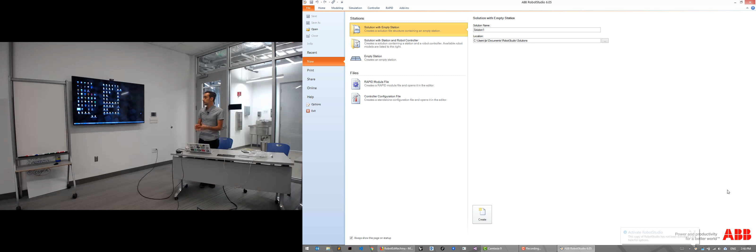So we're gonna do that right now together. We're going to open Robot Studio, and I want to do this with you because sometimes there are a couple details that are missing and they lead to frustration, so that's why I want to do it together. First thing we're gonna do is create an empty controller. And if you get lost or anything, I'm recording this whole thing, so you can always watch it later. Don't be afraid, don't panic.

We're gonna create a new solution with the robot controller. We're gonna call this whatever, like test with Machina with an IRB 1200, for example. It doesn't really matter. Then here you're gonna choose which robot model you want to work with. You'd typically choose whatever is closest to what you have in your school or practice. For the sake of this workshop, I'm going to choose an IRB 1200 because it's a mid-sized robot, and we have one of those downstairs that's very easy to use, so it's a good frame of reference.

So we're going to choose one of those, and I want you guys to please click on Customize Options. We're going to hit Create, and it's going to take some time to process. It's going to prompt you with a menu - this is the menu I wanted to access. This menu allows us to customize what features this robot has. It's like with cars, you can choose extra features which lead to extra functionality, cool things, right?

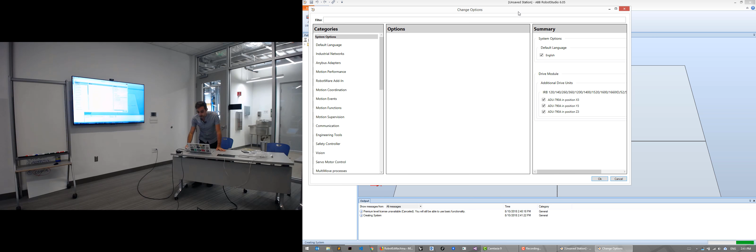It's important, because we're going to be doing real-time robotics, that the robot has what's called the PC interface, which means it's an option that allows the robot to communicate via TCP IP with other devices. If we don't have that in our virtual robot or in the physical robot we have somewhere, you won't be able to do real-time robotics at all with ABB robots.

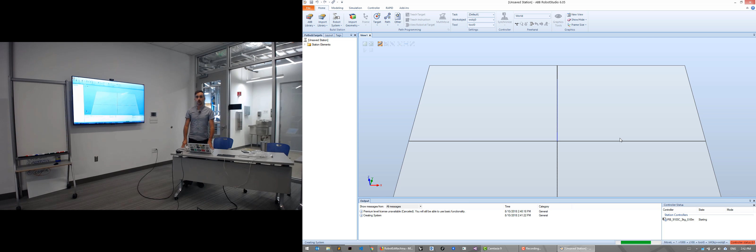So here, we're gonna go to communication and choose PC interface, and then we're just gonna start this one. We're choosing Robot Studio because we want to test things out before doing anything with a physical robot, and it just so happens that Robot Studio as a simulation environment is by far the best thing I've ever encountered for industrial robots.

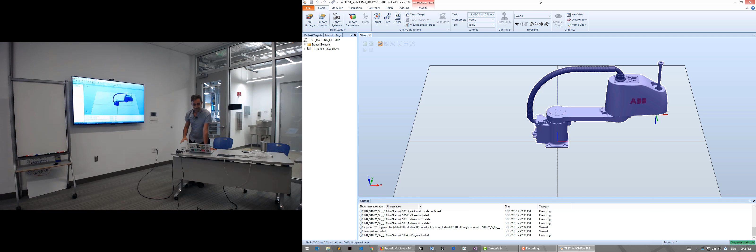And since Machina, which is the platform we're going to be using here, is - oops, this is not the one. What did I choose? Okay, I'm going to start over. I'm going to close this thing. I don't know - all right, and then, oh yeah, okay, so this one.

And as I was saying, since Machina is a programming language that connects to many different virtual and physical robots with the same language, if you try things and they work with ABB robots in Robot Studio, very, very likely they're going to work the same in any other brand of robot or with any other physical robot. So here, I'm going to be prompted to choose this guy.

And that's it. We have a virtual simulation of a robot. And for all practical purposes, this robot that we have in our system, in our computer, is as if we were physically connected to a physical actual robot. All right? We can do TCP communication. We can do messaging, socketing with this guy as if we were connected to a physical one. That's why Robot Studio in particular is very good for these kind of real-time simulations.

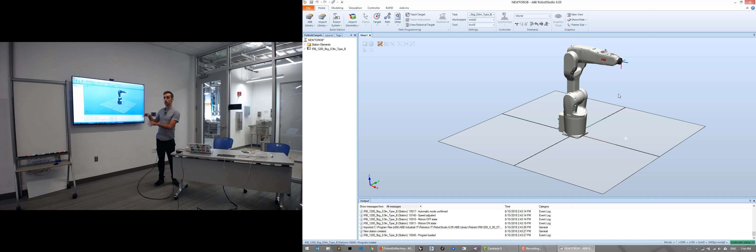All right? Any questions so far? Okay, so then let's go back to the cool stuff. We're going to minimize this for a second, all right? And I'm going to prompt you guys to come here to the main website with the repository of all things Machina, okay? The website is github.com/robotexmachina. And Machina is a project that I've been working on for the past year, year and a half.

And it's like many other projects in this field. It's a framework of systems that allow you to customize, to control, and to program robots, right? There are many of those out there. And the special thing about Machina, the thing that makes it a bit different, is that it tries to focus a bit more on the real-time aspect of communication with robots, right? So most of the decisions that I made on how Machina behaves and how the language looked like is catered towards making it very immediate.

All right? Many of you have probably 3D printed something in your life, right? 3D printing is a process where you basically make all the design, you model everything in a digital environment, you make all the slicings with your tools, and then out of that slicing, you create some kind of program, like G-code, for example. You put it on a file, stick it to a printer, and then you hit play. And then you hope that runs, right? That is not real time at all. Everything is pre-compiled, pre-processed, and once you start the actual fabrication part, you're done. You're out of the process, right?

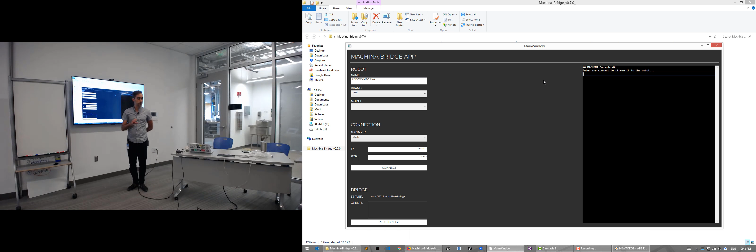You will have a folder where you have a lot of executables, DLLs, and very likely if you're running Windows 10 and you double click on the main file, which is Machina Bridge here, it will give you an alert like, oh, you downloaded this from the internet, it's dangerous, blah, blah, blah. Well, if you don't trust me, then you can leave right now. Otherwise, you can just say, no, I just want to run it anyway. And when you double click, something like this should pop up, all right?

Again, I pre-apologize. This is super, super bare bones. I'm working on this every day. And there's a lot of things that are missing here and are popping up as I have time.

Who's with me? Who is not with me? Are we all here? Matthias? All right. Are we good? Everybody? Okay, great.

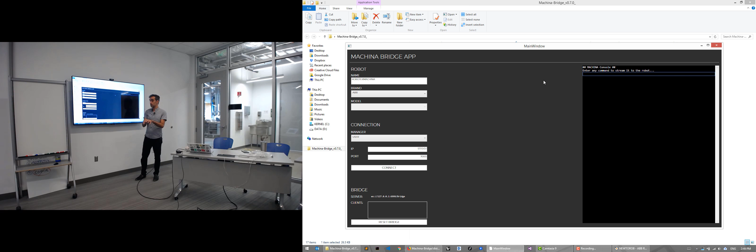So what is this? This is a small application that I'm working on right now, as of today, which is powered by this core library that I told you about. What this application does is it connects to physical or virtual robots, like the one we have right now in Robot Studio. So we can input here the data, and then it gives you a small console, like a command line, where you can input actions that you want the robot to execute right away. All right? So let's see how that works.

What I'm going to do is move this to the right, and I'm going to dock my Robot Studio on the left-hand side. And I'm going to go here, and I'm going to choose a couple of things. Here, you could write what name you want to give this robot. Here, you would choose the brand of robot that you would want to work with. Right now, we can only do ABB or Universal for real time. KUKA is coming sometime soon.

And then here, you want to choose which kind of connection manager you're going to use. I'm not going to get into this right now, but just for the sake of this workshop, just type Machina, because Machina will basically take care of everything that means connecting to a robot for you. All right? So we're going to do this, and I'm going to hit connect. And if everything goes well, I should see things happening here in Robot Studio.

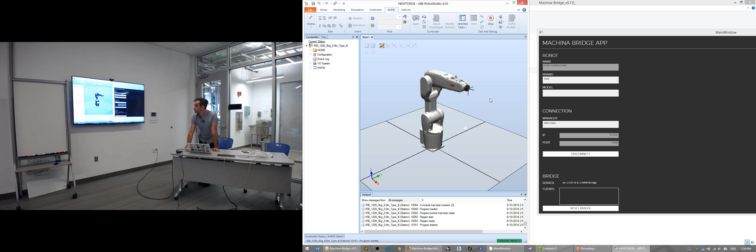And if I go to the Rapid tab, you can see that the button that I had here for executing programs is not a play button anymore, it's a stop button. Which means that right now, Machina did connect to the robot. It injected a special program called a driver. And now it executed this driver, which means that the robot right now is executing a program that is listening for instructions coming from this guy. All right? The robot is executing, but it's just listening for me to tell the robot to do things. All right? Any questions so far?

All right. So now I'm gonna switch to this part. Because we are connected already, and because the robot is listening to me doing actions, now I can tell the robot to do things. So for example, here in the console, I can click on the console, and I can type Machina-style commands to make the robot do things. So for example, I can make the robot move in any XYZ direction. So let's say I want to make the robot move in the Y direction. And I want to make it move 100 millimeters.

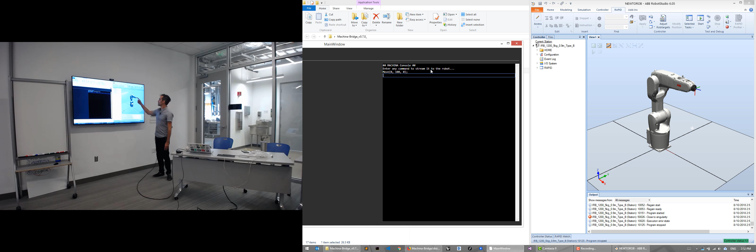So what I'm going to do is I'm going to say move. I'm going to open parentheses, 0, 100, 0. I'm going to close parentheses, and I'm going to put a semicolon. If I do that, you can see that the robot just failed. The robot just failed because the robot is very close to a singularity. All right? So let's wrap up again.

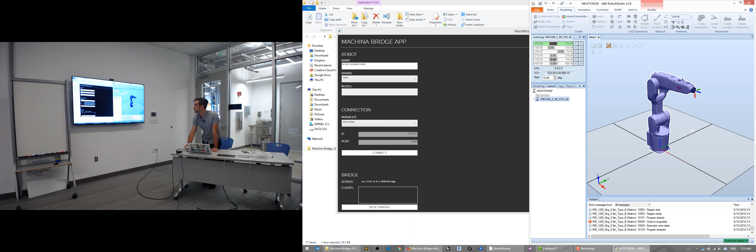I'm going to disconnect from the robot, and then I'm going to do a small trick where here in the robot, I'm going to move it manually out of the singularity by going to modeling, right-click, joint jog, and then just moving one of the joints. Okay, for example. All right?

Questions? How are we doing? Is it moving? In Parallels? Yeah. No? What is not working for you? All right.

All right. So, because you're doing this, like, what is it called? Where's the bridge? Okay. Can you connect? That should work, right? Okay, yeah, that should work. All right. I'll try. Well, that's a very tiny console, man. Huh? Are you still there? Oh, shit. Because in the beginning you did something that I think we skipped, and now every time we connect, it automatically closes Machina. Okay, so close this guy. Just create a new one here and choose this one. Yeah, there we go.

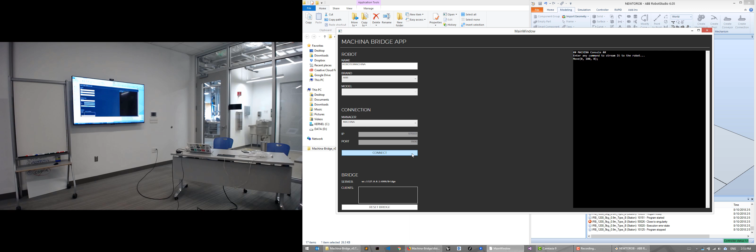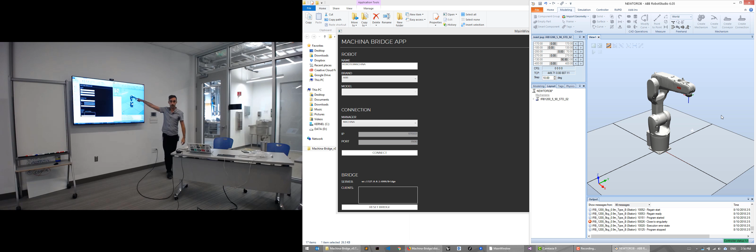So, okay, let's rewind. We have the robot here. The robot is not on a singularity, meaning the robot is not facing forward like this. So you can just move it somewhere like this. And then I'm going to connect again. As I connect, you can see that stuff happens here, and the program just started, which means this is listening to Machina right now. Let's see if this works. I'm going to move 100 units in the Y direction. And you can see that this thing is moving. I'm going to wait until we're all here. Matthias.

Good? Okay. Because this is all in very early development, and because robots can be dangerous, if anything goes wrong with the bridge or with the communication, everything is going to crash and give you a fatal error. You're going to have to restart again. That is on purpose, because I don't want you to have an error that you didn't realize and keep going. That may lead to bad things. So that's why some of the people who've been using Machina for longer are a bit frustrated with the amount of errors, but it's a safety measure as of today.

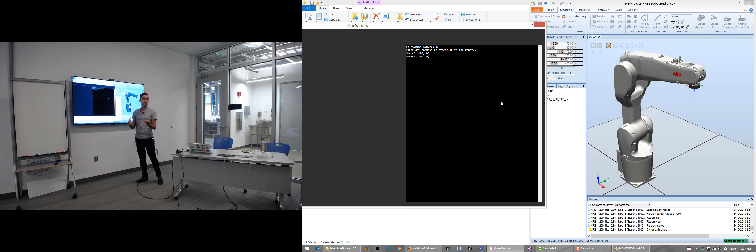Are we all here? All right, so let's start playing with the robot. As you can see, we have this command line here, and any action that we tell the robot to do, it's going to do right away. So for example, we can move in any XYZ direction. I'm going to move up: 0, 0, and 100. Now I'm going to move in the X direction, 50, 0, 0. And now I'm going to move down a lot, like 300.

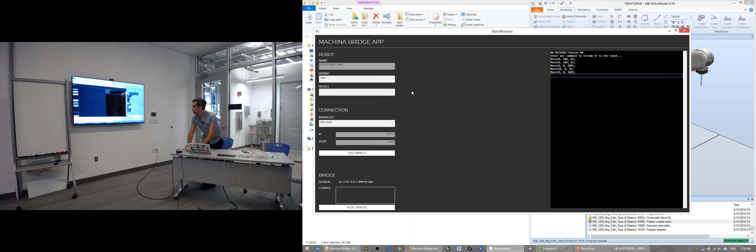And, oops, nope, I went too far up, and the position is out of reach. So what I'm going to do is just disconnect, connect again. The program started, so now instead I'm going to move it down: 0, 0, minus 300.

Notice that it's going to take some time to go down. So in the meantime, I can tell it to go in the Y direction. Machina also takes care of queuing and buffering everything for you. This action is not going to execute until the robot is done going down. The next action doesn't trigger until the previous one is done. It manages all the queues, the buffering, giving priority, etc.

This is a little slow. Perhaps we want to speed the robot up. So we can do speed, and set it, for example, to 100 millimeters per second. If we do that, nothing happens in the robot, but the next action is going to go faster. So I'm going to move up 200, and now the robot is moving much faster. Questions? Matthias? Valentina? Good? Yeah. Linear TCP speed. The speed is always in relation to the tip of the robot.

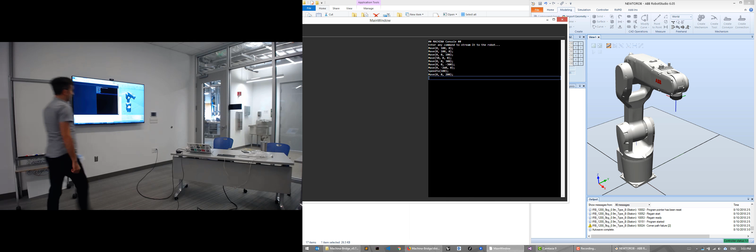Just transform is a more in-depth command for moving, because you set location and orientation at the same time. All right. So now you should be able to move, actually. Matthias, you should be able to move. Simply move now. All right? So, things you can do. You can move in any direction, right?

But you can also move to a location in Cartesian space, like X, Y, Z. The difference is, instead of saying move, which is a relative action, so from wherever you are, move a little bit in X, a little bit in Y, you type move to, where you're saying, I don't care where I am, I want to go to this new XYZ location. So for example, 300, 200, and 400. The robot is going to go to those absolute coordinates in Cartesian space. All right?

I can still move relative in any direction. I can move up. All right? Does that make sense? Okay. Other things that I can do. What are the things you think you would want to do with the robot? How would you want to move it? Simple moving is a bit boring.

We may want to rotate the tip of the robot, right? So for example, let's say we want to make this robot face me. If I was in the front, what kind of rotation would that be? A rotation around what? If I wanted to make the robot face me like this, we can rotate around the y-axis, right? So it will be a rotation around the y-axis.

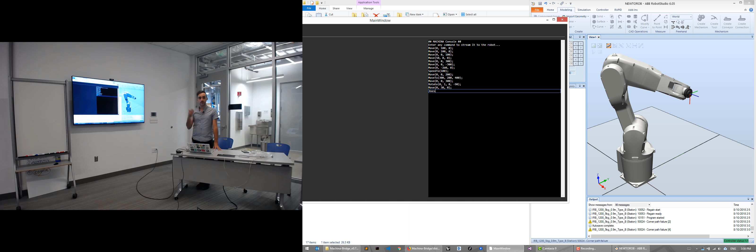For example, home position, like we started, is a very common position to start and finish a program on. For ABB robots, the joint angles are 0, 0, 0, 0, 90, because it's facing down, and 0. So we can set the axes of the robot to the absolute values 0, 0, 0, 0, 90, and 0. As I do that, the robot rotates back to its original position. Home position.

I don't know where this point is in space right now, but I know that it's always going to be this posture for the robot. All right? Okay, any questions?

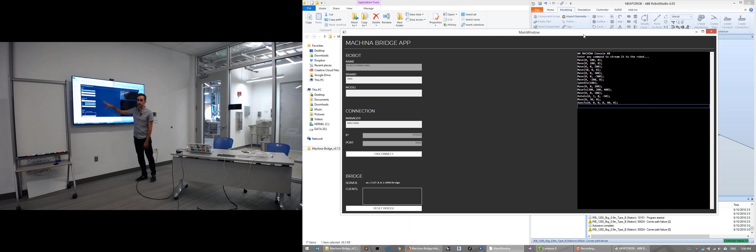So, as I was saying, this is super, super bare bones, and the console should give you way more feedback on what's going on in the system. There will be more buttons here to stop, play things, to look at the queue of things that are happening. It's all in progress, all right?

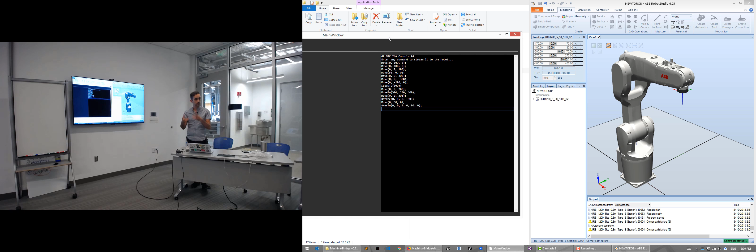But one of the nice things about, well, let me put a pin on this one, all right? So if you use this application, the bridge, you can connect in real time, and you can stream, and you can move the robot, and you can see what's going on, right? But we may want to control the robot or to generate programs with the robot that are a bit more complex and that involve a lot more geometry, form, 3D printing, pick and place operations, which if we did them by hand, would be a little bit of a pain in the ass, right?

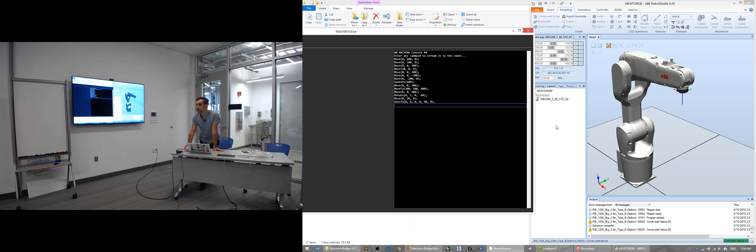So that's why this is the main interface, the more direct one, the most tangible one, but we can use other interfaces that connect to our regular tools that we use. So for example, did you download the Machina for Grasshopper application? If you go to the main repository, you can see that there's actually a lot of different tools that connect to different platforms.

So there's a Machina that you can use in Grasshopper. There's Machina that you can use in Dynamo. There's Machina that you can use if you work with Python, if you work with Processing, etc. And all of them are open source. All of them are accessible. You can hack them. You can contribute to them. You can modify them. It's all very open.

And you can download the latest version for Grasshopper. If you go to the Grasshopper project, you can download it from the distribution folder. You can download the latest zip file, and it contains the library. Or you can go to Food4Rhino, and you will always be able to find here the latest version, the most up-to-date version, with the best features and with the fewest bugs, hopefully, right?

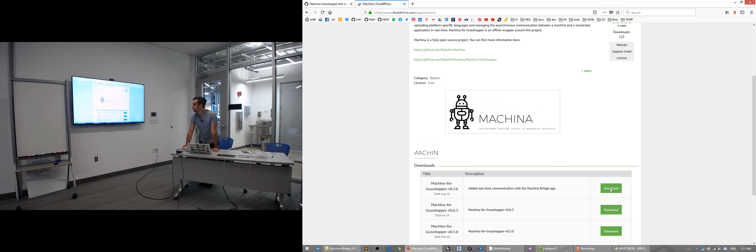If you download this package, you will be here. You can extract this, and what you will get is this. These are the files that you have to dump into your Grasshopper libraries folder. And this is a package with a lot of sample files, so that you can see how it works, okay? I'm going to give you a couple minutes to install this on your system if you haven't. I already have it.

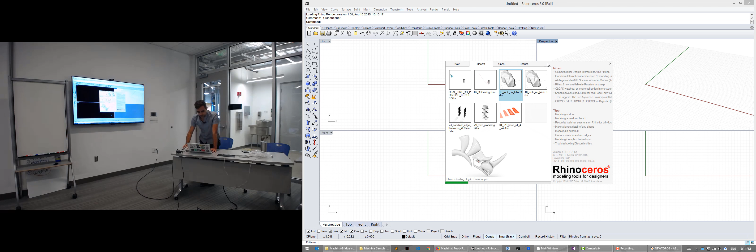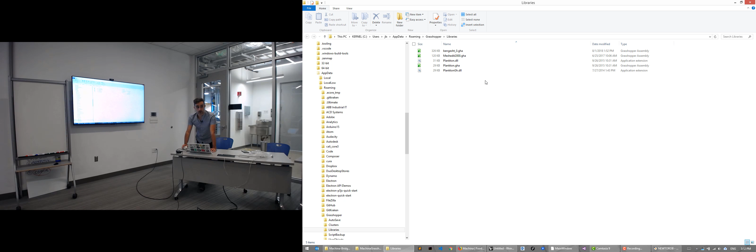For those of you, you probably know already how to do this, but if you open Grasshopper and you go to special folders, you should be able to click on the components folder. In the components folder, this is where you should dump the 3 files that you downloaded. So these 3 files, you should paste them inside of the libraries folder. And remember, please, to right-click on those files and to unblock them, because you downloaded them from the internet. All right?

After doing that, you will have to restart Rhino and Grasshopper, both things. Once you do, you should be able to have something like this. You should get a new tab here called Machina, and you should get a set of components like this. It does or it doesn't? I haven't tried it yet. It works? Yes.

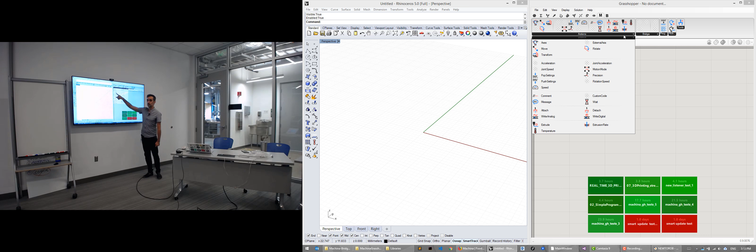As you guys can see, I could totally use some help with the icons, which is also an open source project, just in case there's any designer here in the room, if you want to contribute to an open source project.

Yeah, it doesn't block the files. Yeah. Are we all here? We got it?

All right, so I'm just going to open some of the sample files. I'm going to go to the sample files, and I'm going to open the hello world, for example.

The main idea when you create programs with Machina is that you create programs by defining what the robot wants to do, which actions you want the robot to execute, one after the other in sequence, like you would for a kitchen recipe. Do this, now do that, do the same. It's very straightforward. So anything that the robot can do is called an action.

And anything that's an action is in this large menu here. So like you saw before, for example, moving, rotating, setting the axis, or setting the external axis, changing the speed, popping up a message on the robot, waiting for an amount of time, all of those things writing into the IOs, or, for example, extruding, setting the extrusion rate, setting the temperature, because Machina also works for 3D printers. So all those things are things that you can do.

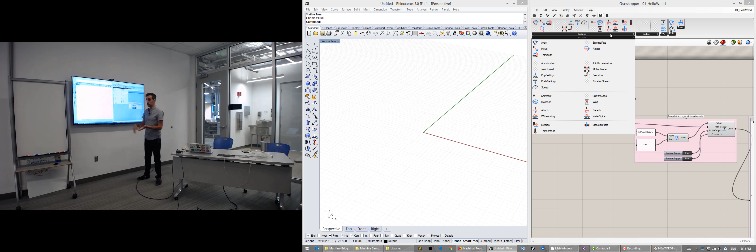Basically, creating a program is just as simple as creating a list of actions and then doing whatever you want to do with them. So for example, here in this simple program, what I've done is I just created an action, which is display a message on the robot.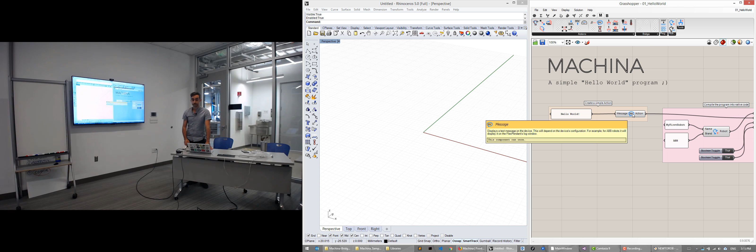Once I have that, what I can do is I can compile that list of actions for a robot that is an ABB robot. And what this component will give me is just like a really large program with the code in the native language for that robot, that I can now right-click, save on a file, put it on the robot, and execute.

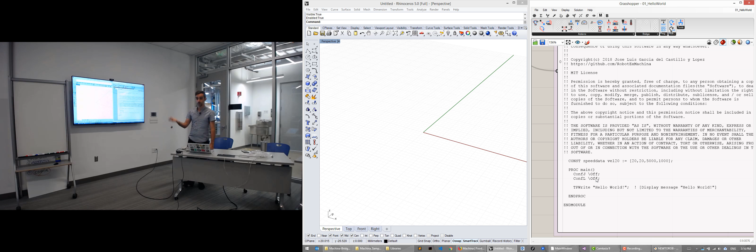So with Machina, you can also work in the classic mode. You can do offline programming, and you can do it for many different brands of robots. So for example, if you have a simple program that is going to draw a vertical line.

Let's see what this does. Here, I have a program where, let's see what this is doing. First, my program is just, as you guys can see, it's just a bunch of actions, one after the other, that I put together into a list. And the first thing is I'm going to display a message on the robot.

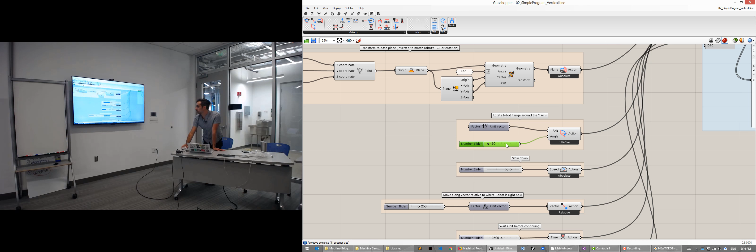I'm going to set the speed, and I'm setting the speed in absolute terms. Then I'm setting a plane, and then I'm moving and transforming to that plane in space. The plane is at 400, 200, and 500. Then I am rotating minus 90 degrees.

I'm slowing down the robot. I'm moving up in the Z direction, 250 units. I'm waiting 2.5 seconds, and then I'm setting the speed faster again, and I'm moving back home. I'm using the axis to go back home.

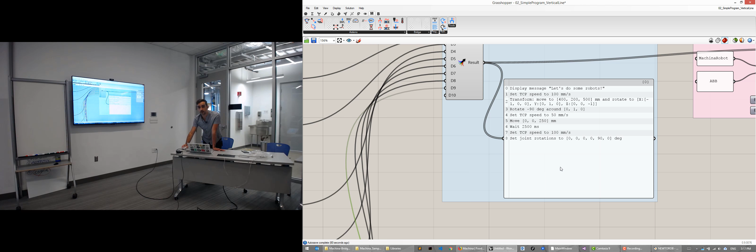If I put all of those together, I can create a program with all of these instructions, one after the other, and I can visualize it. So those actions, if I represent them with text, I can read humanly, like, hey, this is what the robot is going to be doing one after the other.

And I could now, for example, compile this program for an ABB robot. And that program in ABB code, in rapid code, is going to look something like this. Blah, blah, blah, move L, wait time, MoveAbsJ, whatever this means. I don't even know.

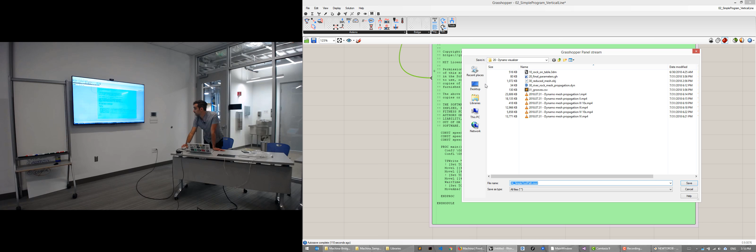But I can right-click here. I can stream to my desktop, for example, simple path PRG. I can stream this. And now in my robot, I can just manually load it.

I'm going to stop this. I'm going to load here. I'm going to load that program that I just outputted here.

All right, I just loaded the program, and then I'm going to execute it. So I'm just going to hit play, and the robot is moving here. Now it's going to rotate minus 90 degrees. Now it's going to move up 250 units. Once it gets there, it's going to wait for 2.5 seconds. And now it's going to go back to home position.

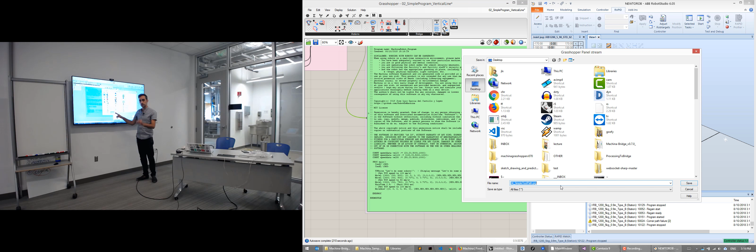Yeah, absolutely. So what I did was, here in this panel, I right-clicked on Stream Destination so that I chose a file to write this text to. And I chose whatever name .prg. PRG is the program extension for RobotStudio files. All right, I saved that somewhere on my desktop.

And then, in order to load this on the robot, first I did stop the program that was running, the connection with the bridge. I went to the Rapid tab here. I stopped the program. I extended Rapid. I extended T-Rob. I right-clicked here on T-Rob, and I hit Load Program.

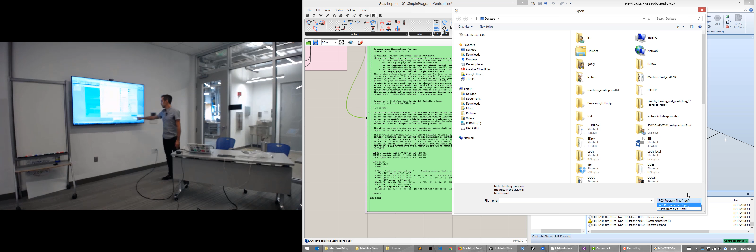I did load this program. I went to my desktop, and on the right-hand side, I chose the PRG format. I had the file here, so I loaded it, and then I just pressed play, start, and the program executed.

Right-click on T-Rob, load program. They're different—you can load modules or you can load programs. The program is the whole thing. The module can be just like a part of a larger program.

Is that clear? Did you choose, when you load the program, did you choose the PRG format? No, when you load it— yeah, so sorry, so that PRG. Right, save it. Now right click here again. Right click, hit on stream, stream contents, all right, you got it there. So now right click on there, load program.

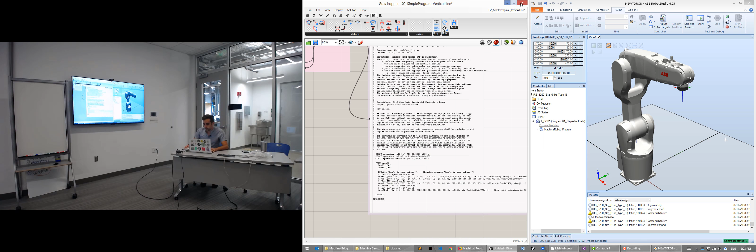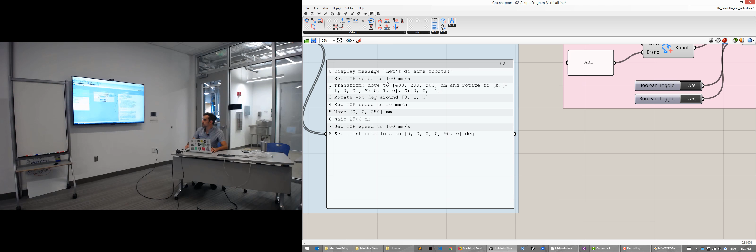You can use Machina like you use any other robotic framework to create offline programs, because actually creating offline programs is fairly easy. So for example, one of the nice things about Machina is that right now, the same program for doing all this stuff, we just compiled it for

ABB robots in rapid code, right? But if instead you were working with KUKA, you could just change the model of the robot, type KUKA here, and then we get the exact same program, but instead in KUKA KRL code. Or if you're working with universal robots, you can just type UR, and then you get the same program in UR script. If you're working with a 3D printer, for example ZMorph, then you get the same code, but now you get G code.

And you can also turn on and off having these kind of comments to help you. All right?

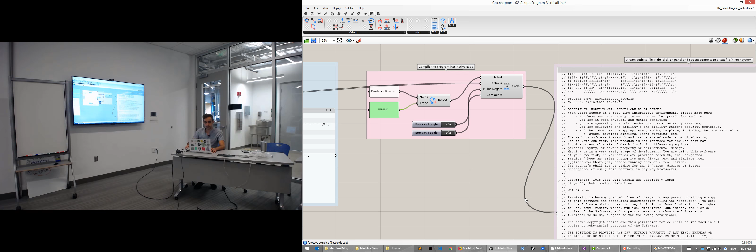Or if you just want to send this to a human being, you can just type human here, and then you get a human readable representation of this program. Or if you actually want to learn a bit more of how Machina works inside, you can also compile to Machina code. So I can type Machina here, and this program will be compiled to the exact same format that you would need to copy paste in the console.

So if you want to learn what kind of commands and things you can type in the console, you can come first to Grasshopper, where you have icons and tooltips that tell you what things you can do. And the exact same program you create here, you can compile in Machina style, copy paste it in the console, and stream it in real time. Any questions so far?

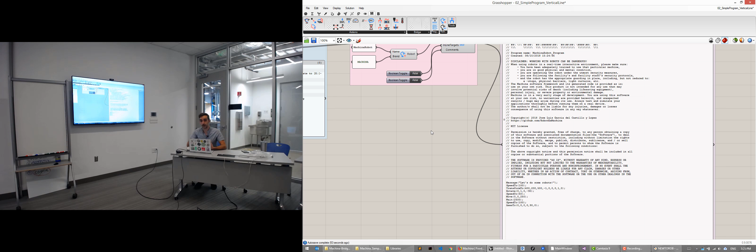All right, so this is all the offline boring part. But Machina can get a bit better once you start working with the real-time aspect. So let me wrap this back down and let me connect back. Actually, let me stop the recording for a second just in case.

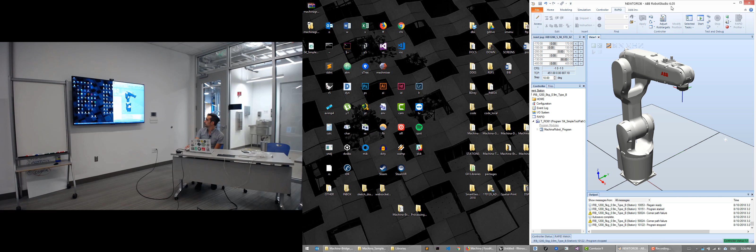All right, so I'm going to go back here. We have the robot, I'm going to connect the bridge again. So I'm going to start, I'm going to connect the bridge. And it's not working because something is wrong. Oh yeah, I need to set Machina here and connect. And now this is working. All right, we are connected again.

Okay, so as I said before, there's a lot of things we can type in the console, all the actions, right? But one of the interesting things about this application is that when we were working in Machina a couple months ago, we thought that if we kept it like this, the way it was, we were only bound to people who knew how to write in C# or who had access to C# powered applications, or who were going to use Grasshopper or Dynamo, but nobody else.

So actually, in collaboration with Nono, we had the idea of creating an application that would expose some kind of global protocol, a standard protocol that all programming languages could access.

And that's where the idea of the bridge came in. One of the nice things about this application is that you have the console, you can type things in. But at the same time, while you're running this application, the application in the back end is running what's called a WebSocket server. A WebSocket server is a server that accepts incoming connections from clients and allows for exchange of messages.

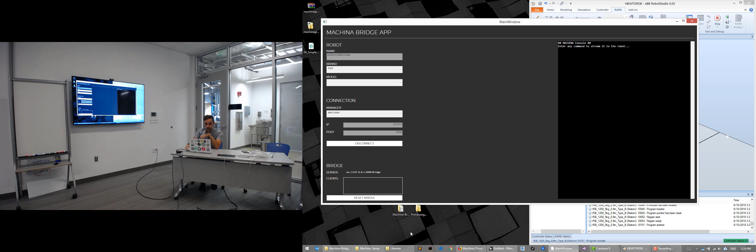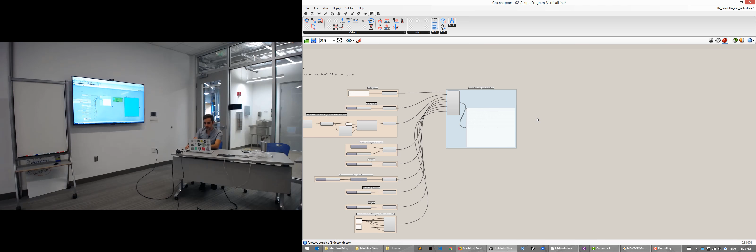So for example, let's say I'm going to open this again. I'm going to remove from the example everything that is the compilation part, I don't care about this anymore. What I care about is taking these actions and being able to send them to the bridge and execute them in the robot directly from Grasshopper, without having to make a file, etc. The way to do this is actually fairly simple.

If you go to the bridge category, the first thing you can drop is a connection component that has no icon - I'm going to say this again, it has no icon, it's very sad. And the connection component, what it does is it connects to the bridge. So you need to have the bridge running in the background.

And then I'm going to plug in a connection, and I'm going to plug in a panel just to make sure we know. I'm going to double click here, and because the bridge is running in the back end, now my Grasshopper is connected in real time to the bridge. And the bridge will act as the middleman between Grasshopper and the robot. So what does that mean?

It means that I can drop now a send component, and I'm going to plug in a couple panels here. To the send component, I can give it a connection to the bridge, I can give it a Boolean toggle for whether I want to send things or not, and the list of actions that I want to send to the robot.

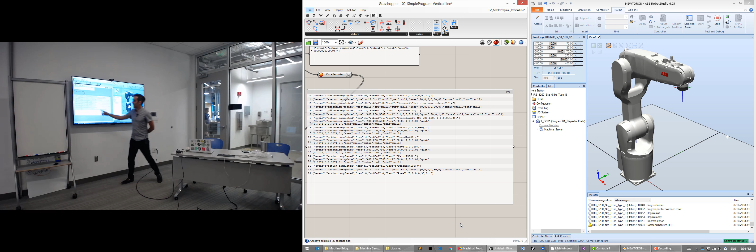However, this is a little hard to read. This is not very human. So if I want to make that a little bit more human, I can use a couple components here that allow me to parse this and convert this into something that is a bit more grasshoppery, right? So for example, if I want to listen to messages like execution update, and these names are not great, I need to change them and make them a bit more understandable, but execution update basically gives me information about the last motion of the robot, right?

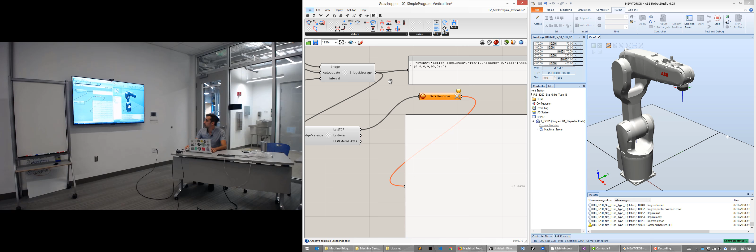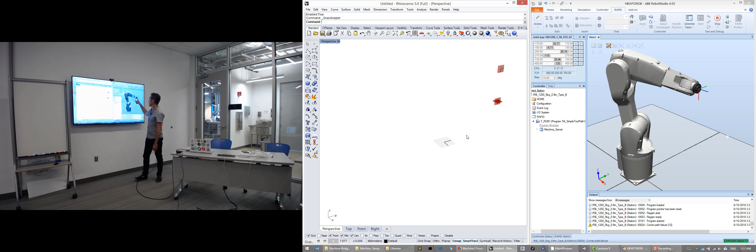So for example, I can connect here. I'm going to send a new package again, right? And this is telling me the last location of the robot. So you can see that I'm getting this plane. So that was when it moved here. I'm getting the rotation plane first, and then I get this plane when it got here. And then as it goes back, I get the axis of when it got back.

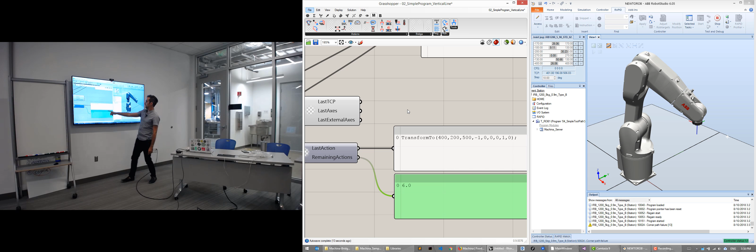Or something that I can do as well is I can connect an action completed. And action completed tells me what was the last action that was executed and how many are left. So for example, I'm going to send a new package, and you can see this is what got executed last, and this is how many are left. So you see, a bunch of those got executed.

Now it's going up. There's 4 left, and when it reaches here, it's going to be move up. That's going to show up here, right? Yep. 3 left, then wait. 2 left, and then back home. And now it's setting the speed faster, and now it's going to go back home. It's going to show axis 2, and then 0 actions left.

What you can get from Machina right now is the theoretical speed, so the speed at which you set it. But you can change it on the fly, right? Also, if your sensor was connected to the IOs, you could get those values from the IOs from these packages that are coming back so that you could respond.

Or something that you can do, for example, is very simple logic with these values. So let's say for the remaining actions, I say, well, if the value of the remaining actions is less than or equal to 0, right?

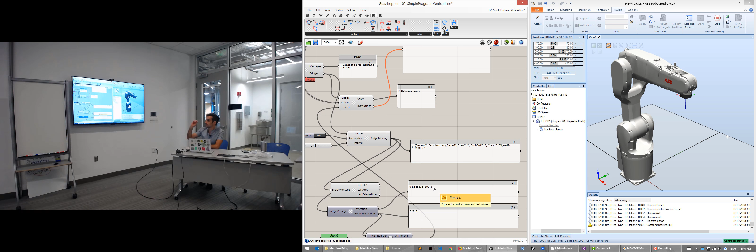You see? Because now it's going to trigger, it's going to go 0. And just like a new batch was sent. Look at him. All right?

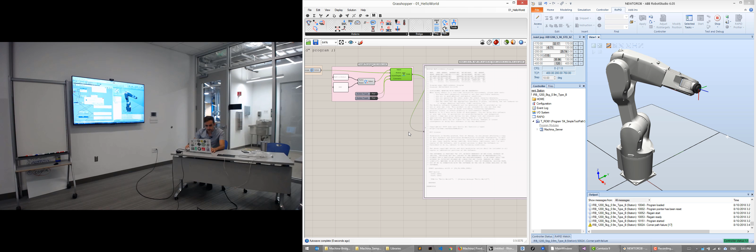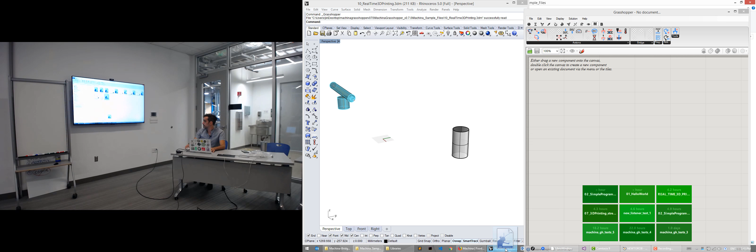Or you can do fancier things. So for example, in the sample files, I'm going to close this because otherwise it's going to go forever. I believe in the sample files, you have a file called Real-time 3D Printing, right? So I'm going to load that into, where is this? So here I have, here. All right. So what do I have here?

I have a bit more of a complex file that has several parameters. So it takes an input, for example, this surface, right? And this is like a 3D printing kind of thing, where what I'm doing is I'm taking a surface, I'm slicing it in horizontal layers, right? And then I'm defining how many points to go for each layer. And then I'm just going to send those to the robot to execute.

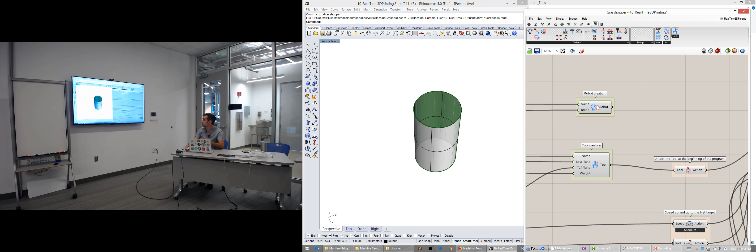And I'm also preparing the robot, so I'm creating a tool that is going to be the extruder. I'm turning the pin for extruding. I'm turning it on. Actually, this is not going to work with this robot because it doesn't have the IOs. Let me load a robot with actual, this one here. This one has an IO. Yep. And I'm going to need to connect this. All right. Nope.

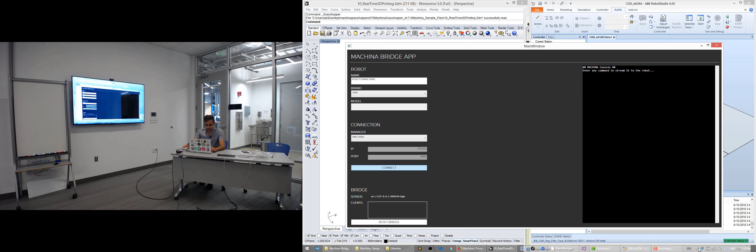Well, something's not working. All right. Mm-hmm.

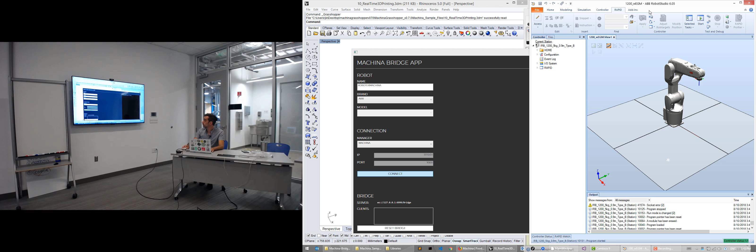All right, so now I'm connected. So I'm going to go back. And what this program is doing is basically creating a lot of target planes for the robot to move through, right? And then after that, I'm turning the I/O off, and then I'm going back home. All right.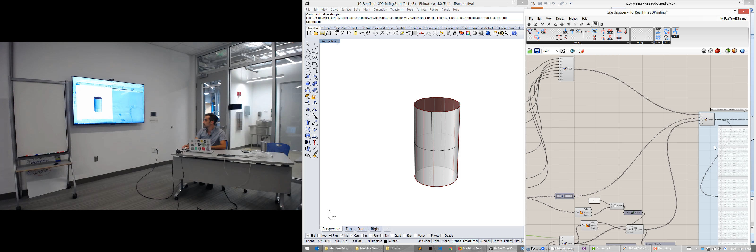The only trick here is that I'm doing a little bit of data manipulation in Grasshopper, so that each one of those stages of programming is a different branch. So the first stage, preparing all the setup, is one block. Then the next layer is another block. Then the next layer is another block, etc., all the way until the very last block, where I turn the extruder off and I go back home, right?

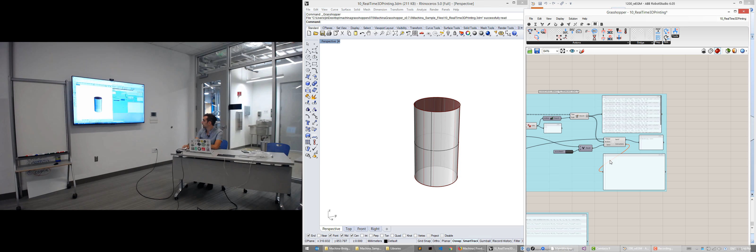Why am I doing this? Because what I want is for this setup here to stream the 3D printing in real time, one layer at a time, in chunks, right? So let's see if that works. The bridge is on, so I'm going to connect to the bridge. I am connected here, and I'm going to give it the initial kick. So I'm going to start, and you guys can see, where's the robot? The robot is going there, right?

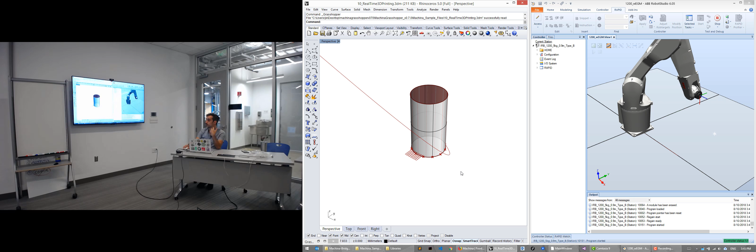And you can see that because I'm getting messages back from the robot, I can know where the robot is at any point during this 3D printing, right? But because that's happening in real time, I can also do things such as, for example, while this is printing, I'm going to increase the speed of print to 100, so that next layer that gets sent is going to be sent at 100 units. Does that make sense?

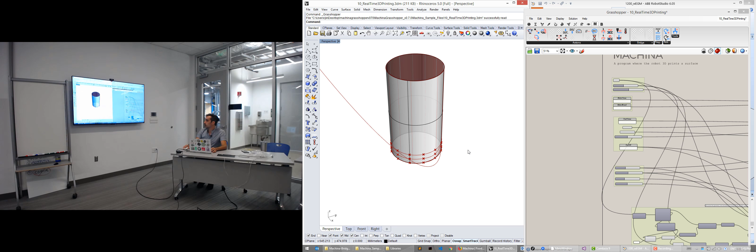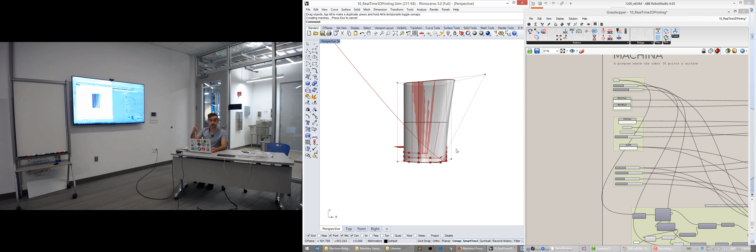Also, other things that I can do is, because layers are sent one at a time, I can change them while they're being sent. So for example, let's say that I take this surface and I change the shape of the surface. I'm going to deform this here. When the new layer gets sent, it's going to be sent with the new information, which means that now the new layer is not going to use the old surface, but it's going to use the new surface. Let's see if that is true. You can see that, yeah, here, it went and it took the new surface.

Yeah, and because what's happening is that every time here, somewhere, every time the remaining actions are 0, a new block is sent. So let's wait for that one to happen. So this is coming here. So around here, the new layer is going to be sent. Yeah, you see that just got sent. The new layer just got sent.

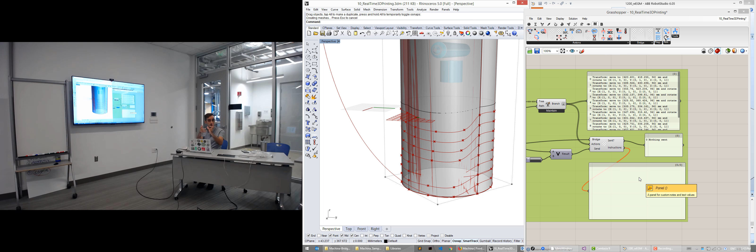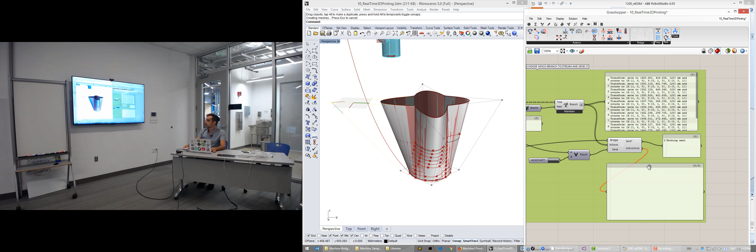But because the new layer is parametrically attached to the shape of the surface, it got sent with the updated surface. So for example, if I keep fooling around with this, I can move this here, right? And the new layers will just... all right.

Yep, that's pretty much what I had. An hour and 15 minutes. Not too boring. Not too bad for a Friday. All of this, again, is super work in progress and heavy development. Things change very rapidly. I think it's getting in better shape than it was before. You guys have any questions?

Well, I hope this gave you an overall idea of the kind of things that you can do with real-time robotics. This is more about breaking this old paradigm of pre-doing everything and then hopefully getting the robot to do it, but more like being responsive to what's going on. So with these kind of setups, you can more easily, for example, take sensor information from an Arduino, from something that's connected to the robot, and then respond with a movement that is catered to that information.

You can do real-time things such as move your hands with a Vive controller and send that to Grasshopper right away to send to the robot. You can perhaps respond to temperature changes, or if you're measuring your 3D print, and if it sags, perhaps you can also react to that. This opens a new set of possibilities that I find interesting, personally.

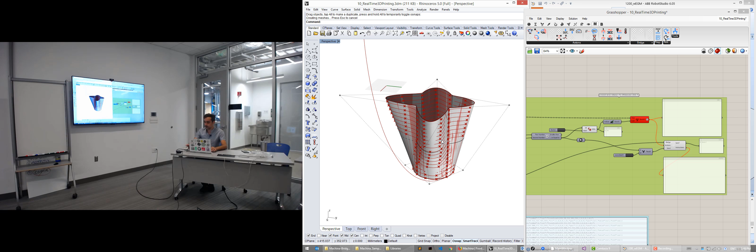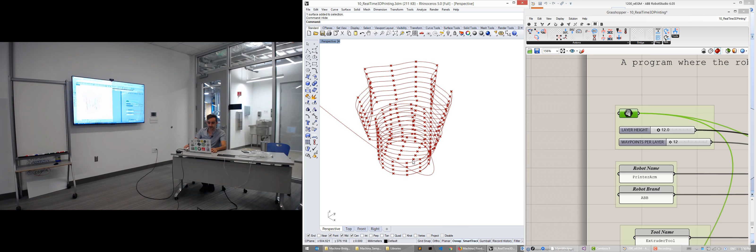Cool. Let's see what we printed. Well, the actual print would look something like this. This would totally not work, but well, you can implement constraints and blah, blah, blah, you know. Work in progress, work in progress. Right? But this is real-time 3D printing, guys. All right. Beer time.

So one of the interns was going to develop the Python library. I'm not a huge Python user, but it's literally just writing something that connects with the WebSocket server, and then just sends string messages with the Machina format. For example, I have a JavaScript one and I have a Processing one. It shouldn't take much to do a Python one. And actually, the way you know how to write Python, it would take you probably a couple hours to do it yourself if you wanted to.

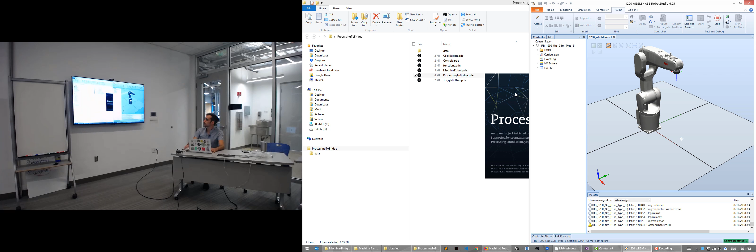I have an example. I'm going to close this. I sent you guys an example of a Processing application, right? So where is that? Processing to the bridge, yeah. So basically, same thing. Here with Processing, you can see that I have this sketch here. The sketch has a WebSocket client, right?

And it has this Machina robot, which is basically a super, super simple class, right? That has a constructor that stores a WebSocket, and then just a lot of methods that have the same format as the actual Machina API. So when you use this in Processing, it just feels like Machina, but it's just a really thin layer on top of the underlying, which is sending a string with that format to the bridge, right? It's literally nothing.

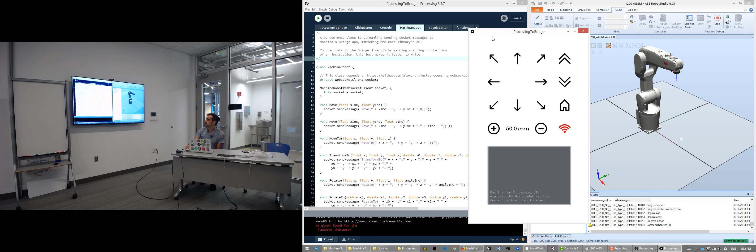So, if you run this, all the code here is just making this UI fancy with the icons and blah, blah, blah, but it's not complicated. So here, I think you can connect like this, and you connect to the bridge, right? And I think there was a tool here, so that's why it's doing this weird thing. But then you can go here, and then this, like this, right? And what this is doing is just sending super simple move instructions to the robot. All right.

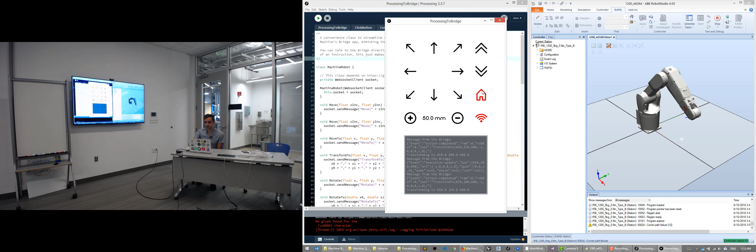No disappointment? Yes. I know you will. You're good at that. All right.